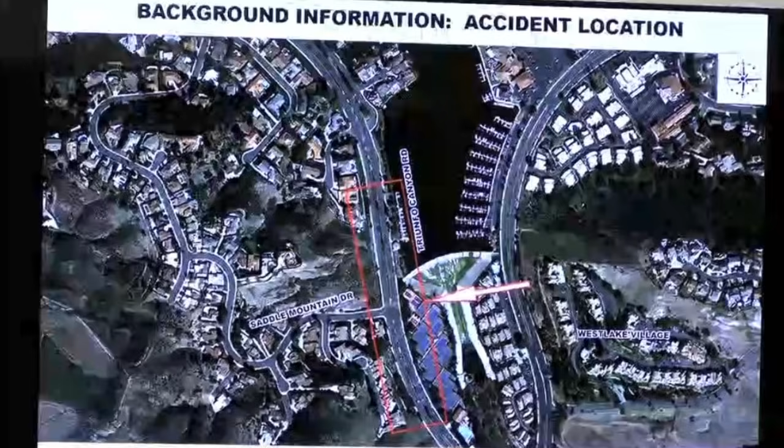Is this an exhibit marked? Yes, 408. I'm sorry, 408-4 now. Okay, tell us, this seems to be more filled in. What are we seeing here? Well, now what we're seeing here is we've zoomed in on the image just to show the intersection, and we were essentially drawing a box around the primary area of interest because that's where the events leading up to the intersection are happening. The north-south oriented street in this image is Triunfo Canyon Road, and the cross street at a T intersection is Saddle Mountain Drive.

May I approach, Your Honor? Yes. Would it help to use a pointer and explain what we're... Yes. May I write? Thank you.

So the aerial image essentially captures Triunfo Canyon Road. From the lower edge to the above is the direction that Ms. Grossman and Mr. Erickson would have been traveling in. There's a crosswalk on the far side of the intersection, and this is where the young children and Nancy and Zach would have also been coming from left to right.

Keep your voice up. Keep your voice up. I will, sorry.

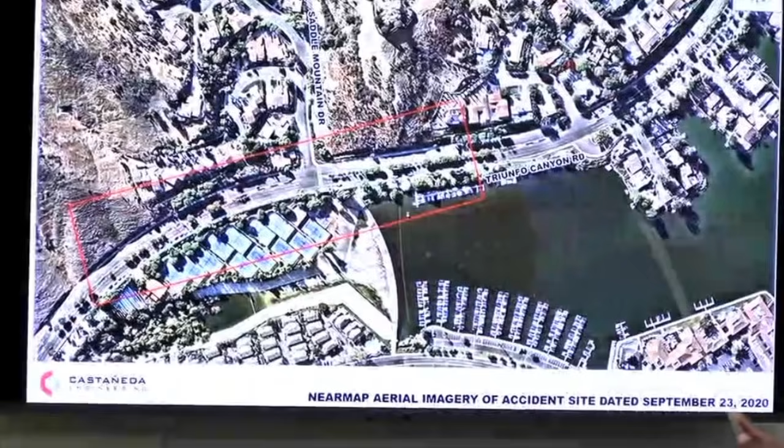Okay, we're on the next one. We're zoomed in a little more. Yes, and what we've done now is essentially started rotating the image without losing sight of what's going on. It's always easier for us to work from left to right when vehicles are traveling at a high speed. So we're essentially rotating the image in consideration of the compass. And in the photograph, we have Triunfo Canyon Road going from the lower left corner up to the upper right corner. You see the curve, and then the intersection where the crosswalk is located, where the children were walking, is within the red box at the approximate center of the box, far side of the intersection.

Okay, now we just essentially rotated for the purposes of analysis. Okay, and I've put in two inserts in that slide. Can you explain what those are? Yes. And for the record, that's 408-7. This image actually shows two of the still frames from the surveillance videos that captured the events after the collision. On the upper corner, there's a camera located within this house in the back patio that actually has a field of view extending in this direction and in this direction. Describe that for the record for us, please.

Thank you. My apologies. The house would be essentially covering Triunfo Canyon Road, specifically the direction of travel that Mr. Erickson and Ms. Grossman were in, specifically from a location 225 or so feet past the crosswalk and several hundred feet beyond. So the camera would capture traffic going in the same direction as Erickson and Grossman, but also in the other direction. For purposes of this work, we're focusing on the direction of travel of Erickson and Grossman, and it's actually depicted in that far part of the video still, which is in the amber frame at the upper edge of the slide.

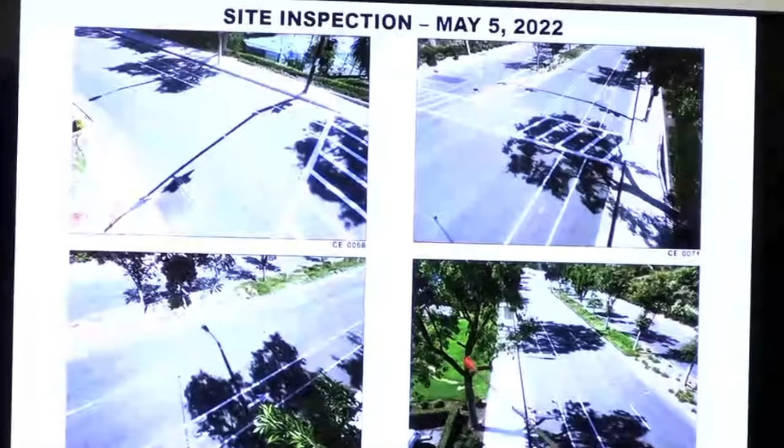Okay, we're looking here now, we're on 408-17. This is a series of elevated photographs that I took at the scene. I have a camera that I mount on a 35-foot pole. And I'm taking a photo of the crosswalk, looking for any evidence that might show up as a gouge or a scrape that would help assist as an area of impact.

The lower left photograph shows the distribution of all the markings made by the officers, which were outlined by me in yellow. At the upper right corner, I'm just standing short of the crosswalk, on the sidewalk, looking downstream in the direction that Erickson and Grossman would have been traveling. And then the last photo that we see, I actually went downstream and am taking a photo of the roadway, and this would depict the direction of travel on approach for Grossman and Erickson.

And one of the things to note here is that there was an outline of what appeared to be a long smear, which would be consistent with a young pedestrian essentially tumbling and rolling through the ground before coming to rest.

All right. And on this exhibit here, what's the purpose of this? It's exhibit 408-18. One of the things that we try to do when we drive through an accident site with our 3D mobile scanner as we're digitizing the site is we actually mount a camera on the vehicle to also document video footage of the roadway on approach. On this particular video, we started some distance before the intersection and drove through the intersection in the process of digitizing the entire accident site.

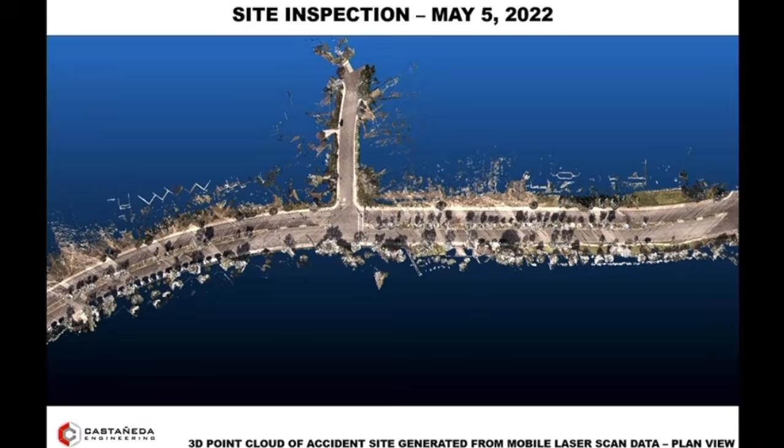You mentioned the 3D point, what do you call it? Cloud. Can you explain that for us? Yes. After we process the data, this is the essential output we get. This is actually a 3D point cloud, which takes all those laser measurements, which are colorized, and we actually get an accurate 3D diagram of the accident site. Of course, it's shown in terms of little points. We just generate the surfaces from the data.

So what you can take away from here is that every tree, all the vegetation, every roadway stripe is actually accurately depicted as measured. So any photograph that you want to reference later on, we can specifically say this particular object came to rest next to a stripe, and I know where that stripe is precisely.

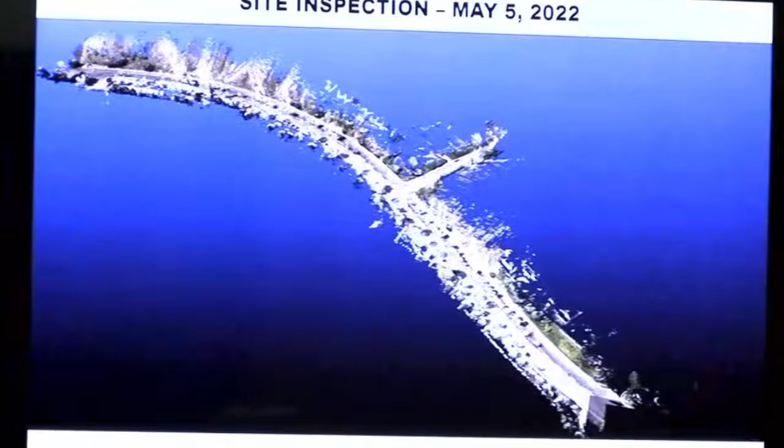And how about this here? This looks kind of different. What is this? This is number 21, 408-21. It's the same point cloud, it's just a different perspective view. This is actually looking past the intersection, but towards the back. And again, this would show the roadway that Grossman and Erickson would be traveling upon, leading up to the intersection and continuing beyond. All right, let's go to, this fills it in? Yes, this is the 3D diagram with the surface roadways. Okay.

Yes. In your career, how many vehicle inspections have you done? It's going to be in excess of 8,000, likely in excess of 10,000. In the 8,000 to 10,000 inspections you've done, in cases where there was injury or death and people are required to produce a vehicle, have you ever, in your entire career, seen someone intentionally produce the wrong vehicle? Relevance. Excuse me. Relevance. Overruled. I have not.

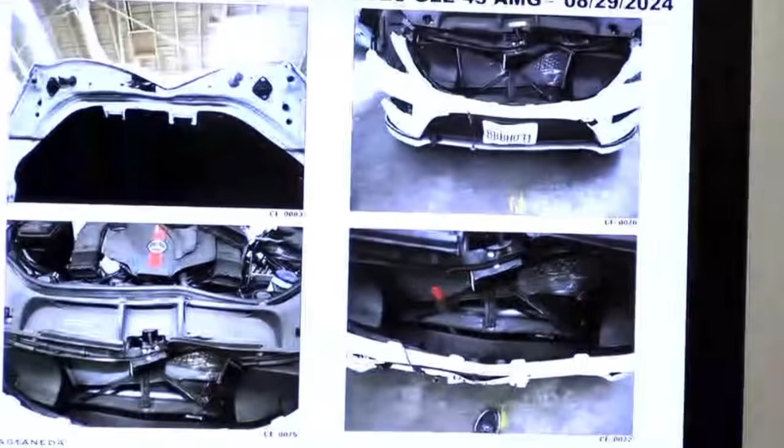All right, let's go to the next exhibit, 30, 408-30. I gotta move it. Okay, what do we see here that's different? Okay, now I'm trying to document the underpinnings. Why is it important to look under the car? Well, first I'm going to look under the hood, and I want to understand the extent of deformation to the leading edge. And I'm also looking for any paint transfer that may not have been captured in the other photos I've taken. I also want to understand how much deflection the vehicle had to experience to essentially cause deformation to load the radiator supports, the cowlings, the plastic filler panels.

In other words, one thing we have to understand in collisions is there's dynamic crush and then there's static crush. Static crush is what we typically measure. In other words, when we go and examine the vehicle sometime after the accident, we're measuring static crush. And let me stop. When you measure static crush, is that the condition of the vehicle when everything's over or some other time? When everything is over. Okay. Now, there's a difference between static crush and dynamic crush of motor vehicles, correct?

Yes, there is. What is the difference? And would you expect to see more damage dynamically or what was the other one? Static. Statically. You're going to see a lot more damage dynamically, more deformation. And that's just part of the concept and understanding of strength of materials.

Materials have properties dealing with restitution, meaning, based on how they're formed, after they're damaged and displaced, they're going to have a tendency after becoming unloaded to try to return to a normal state. What happens in the dynamic collision process is you get maximum deformation, and then after it's over, there's a rebound effect, which results in the permanent post-collision state, which is now a static deformation.

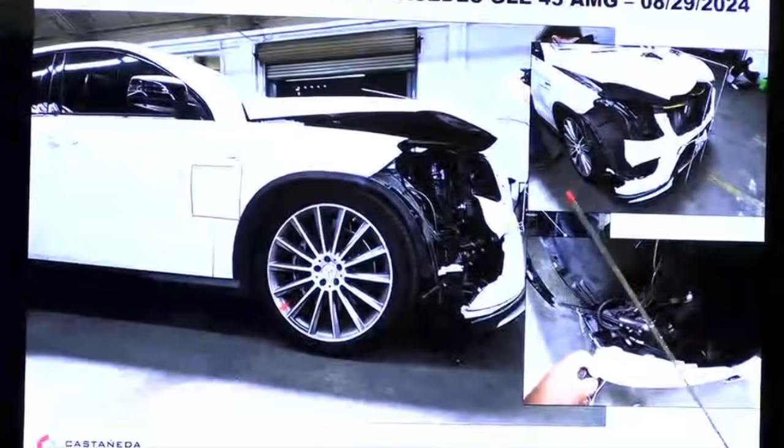Yes, this is, again, a photograph that I took wherein I'm trying to understand the location of deformation to the vehicle on the right side, because now these damages are more specific to Jacob Iskander, the 8-year-old child. By the time I inspected the vehicle, the right headlamp had been removed, but I'm trying to identify markings that I see on the panels. I mentioned earlier there was color transfers consistent with Jacob's rollerblades.

And then we have a deformation at the leading edge of the right front fender. The panel forward of the door, that's the right front fender. The leading edge has been deformed, meaning that energy, or at least loading at the right front of the vehicle, caused the deformation at the leading edge of the fender. And it also imparted some damage to the trailing edge of the fender by the door. So what we're getting here is the phenomenon of buckling. You have a force on the panel and a longitudinal, essentially transferring that load downstream.

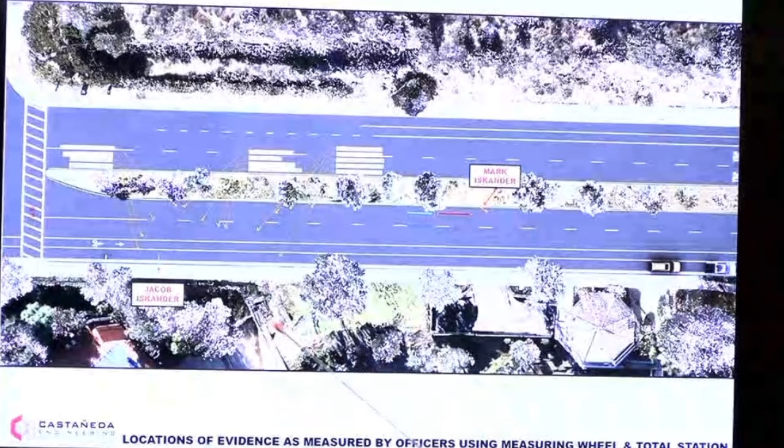Is that what you did here? Yes, this particular slide now is a plan view of our 3D diagram with all the evidence laid out with labels that shows where every piece of evidence documented by the officers was located, including the at-rest locations of Jacob and Mark Iskander. And I mentioned that evidence, the smear on the ground outlined by yellow downstream next to Mark's at-rest position. Okay.

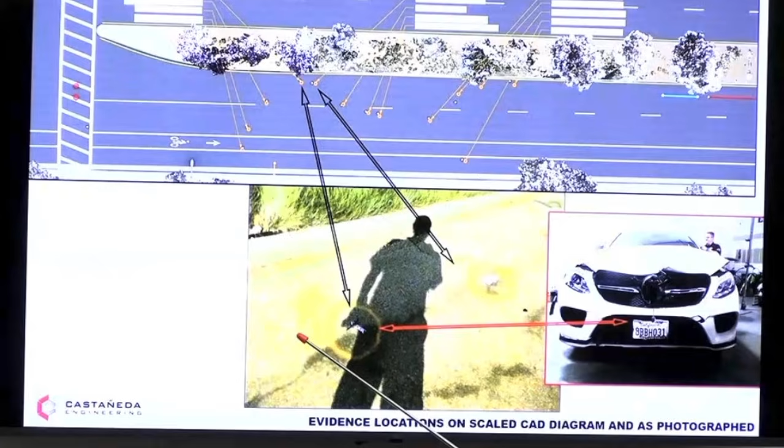This is 408-36. What are we seeing here? Okay, and now what I'm trying to do is help in correlating where some of this evidence is located, but also documented photographically. So for example, in this image, we have a photograph at the bottom. It's a photo of evidence taken at the site. We have item number 4 with an orange circle, and it is labeled license plate debris, which is located here. On the right, I'm actually showing a photo of the vehicle that shows where that came from on the Grossman vehicle. The other piece of evidence is actually a sock from Mark Iskander.

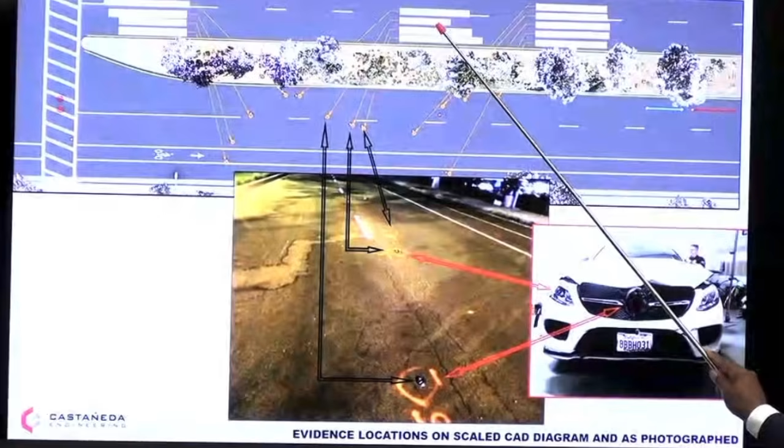And if we go to the next slide, very similarly, we do the same kind of evaluation. Item number 6, V1 emblem, is what the officers labeled it. And that's certainly the center emblem for the Mercedes-Benz, which came from the center portion of Grossman's vehicle. Likewise, V7, the officers labeled V1 fog light debris, and I still don't understand why that happened, but that's actually a chrome trim piece from the right headlamp of the Grossman vehicle. And then downstream, we have another piece of license plate debris. I didn't want to start drawing too many arrows, but it comes from this portion of the car.

All right. Now, using the digitized scene, vehicles, etc., were you able to analyze the video and determine speeds of the vehicles as they were captured in the frames of the video, first from the Golden Leaf Drive surveillance camera? Yes, I was able to do that. How do you do that? Well, one of the reasons we digitize the accident sites is so that we have a full 3D model of the site of the accident. And the way we do it is we identify the location of not just the roadway and the striping, but of all the trees and posts within the center divider, which now can be identified in the camera. So now we actually take this camera and try to do a camera match in our 3D environment. We then select specific keyframes from the video where vehicles are coming by and essentially align with a specific landmark.

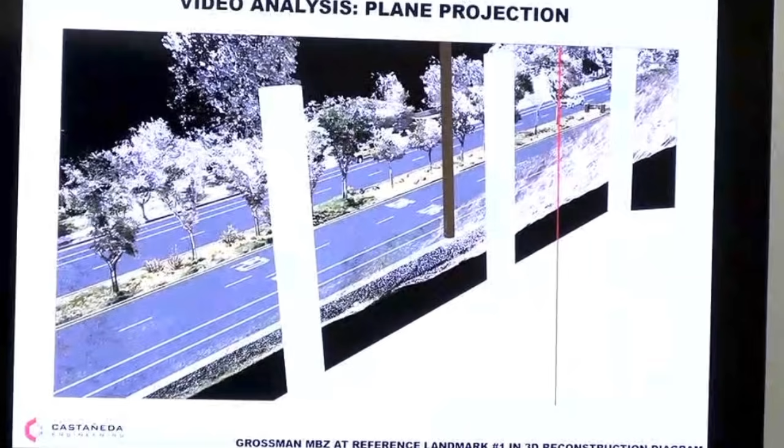So plane, well, explain when you say each plane and how that plays into your analysis. Sure. This is a photogrammetric method of analysis. What we're doing is we're identifying the location of the camera in 3D space. And we're not just drawing a line from the camera through the actual landmark, in this case a tree. We're actually using a 3D plane that we're projecting in 3D. And that's going to serve as a reference mark to identify when the vehicle arrives at that projected plane.

So what we see in red here looks like a line because we're looking at it head on, but it's a 3D plane that's being projected from the camera through that tree and past that tree. And we're essentially using camera matching techniques to identify when the Grossman vehicle arrives at that plane projection as it did in the video frame that we captured. Okay, we'll go to the next one now. We're again continuing on.

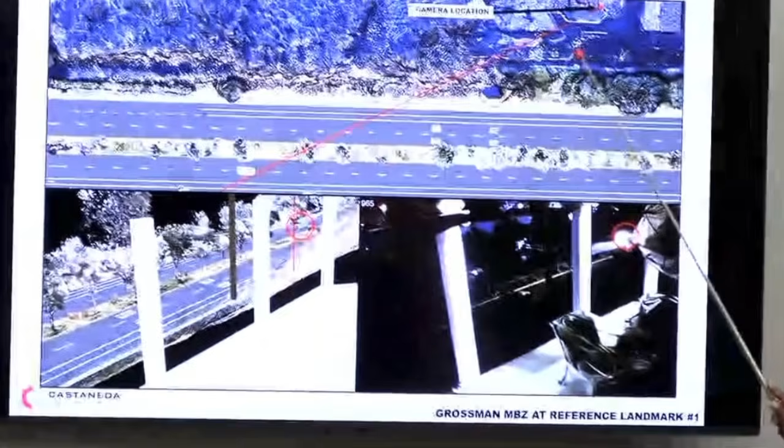This essentially is a summary of that first position. We have the overhead diagram. We have the red colored plane projected through the tree that we identified. We have on the right lower portion the video frame showing Grossman's vehicle arriving at that landmark and the matching 3D digital model. But if you recall my earlier testimony, we work in 3D, so we're actually working in the 3D environment. When we figure out the position of the vehicle, it will essentially reflect where on the roadway it is. Okay.

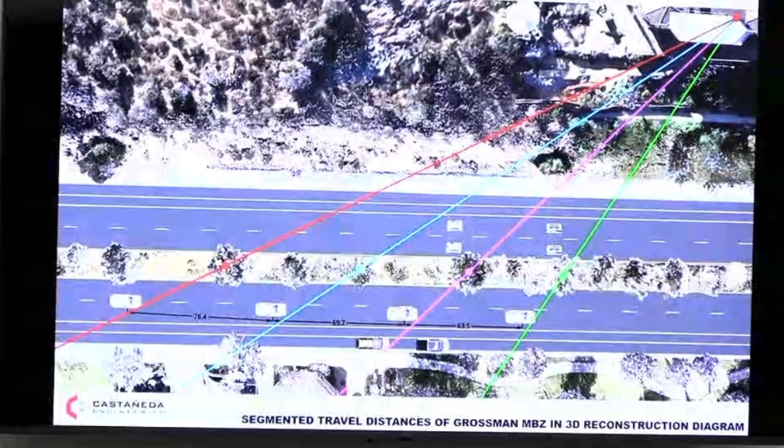Now we have 4 colors. Correct. Remember, the first plane was red, the second plane was aqua, third plane is magenta, and the fourth plane is green. These are the positions of the Grossman vehicle at each one of those key frames. But because this is a scale diagram in 3D space, we can essentially just measure the distance from one position to the next and do so accordingly. And one of the reasons why we want more than just one segment is we can just do 2 vehicle positions and determine a segment average speed. But if we get multiple positions, then we can figure out different segments and determine what it is that the vehicle is doing during that entirety of travel.

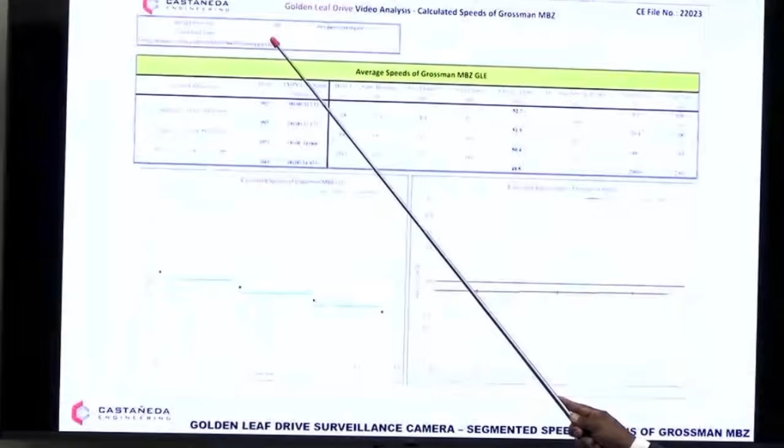And so now that we have those measurements, on the next frame we acknowledge that the camera is shooting at 30 frames per second. How do you determine that? Well, if you recall my earlier testimony, we actually run the video through a separate software that essentially lets us do an inquiry and gives us feedback as to the focal length and the frame rate of the camera. So that's all information. Plus, we also check versus the time clocks as needed.

In this particular table at the top, what we're showing is the specific frame positions that we're using, the timestamps associated with each of those frames, and then we can calculate the time durations in between the frames. And if we know the traveled segment distance and the time duration from one position to the next, we can calculate an average speed of the vehicle as it traveled through the first segment. So in the column that reads SGMT, segment distance in feet, we have the 3 distances for those 3 separate segments. The column prior to that is the time elapsed during the vehicle's travel from one segment to the next. The following column, after the segment distance, we've calculated average velocity during the segment.

So tell us, what was the average velocity of the Grossman Mercedes-Benz GLE during the various segments? Okay. Segment 1, the vehicle is traveling at an average speed of 76.4 feet per second, which essentially is 52.1 miles per hour. During the second segment, the average speed is 74.7 feet per second, which translates to 50.9 miles per hour. The third segment is 73.2 feet per second, which is 49.9 miles per hour.

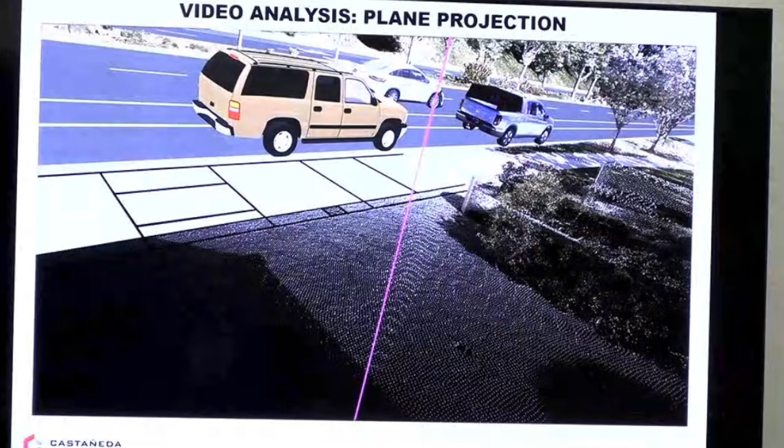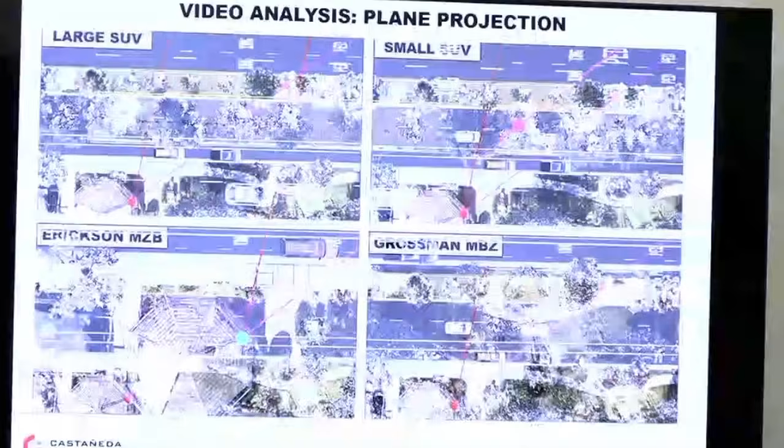Yes, now we're doing the same exercise with this camera, capturing Grossman's position as she's arriving at the start of that first stripe. And then we're matching it in a 3D environment. Then we have the second landmark, which is a magenta colored plane in the very same manner as before, and we do a camera match to get her position there. In this particular analysis, she travels a distance of 44.3 feet from the first landmark projection to the second landmark projection.

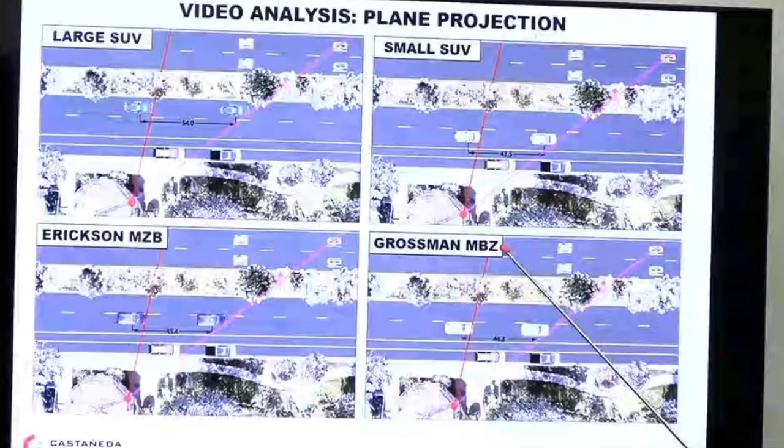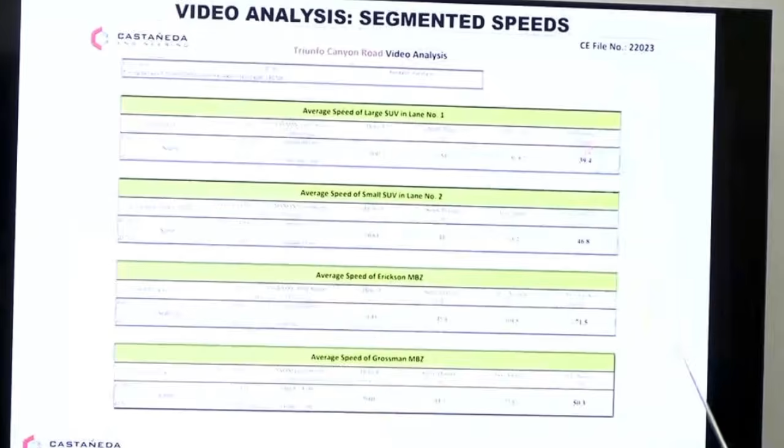And then what we see in this frame is the summary of the exercise for the 4 vehicles. At the upper left corner is the first vehicle, the large SUV. The upper right is the second white-colored smaller SUV. Lower left is the Erickson Mercedes, and at the lower right, we have the Grossman vehicle. How about the speeds? Same methodology as we mentioned before. We have an average speed through that segment for the first vehicle at 57.8 feet per second or 39.4 miles per hour, comporting very well with the previous exercise. The second SUV is traveling about 46.8 miles per hour. The Erickson vehicle is coming through that segment at 71.5 miles per hour.

And then the Grossman vehicle is traveling through that area at 50.3 miles per hour in that segment. Okay, let's talk about the post-collision travel of Miss Erickson. Let's strike that. Do you have an opinion as to which vehicle struck the boys? Yes. And what is your opinion? Oh, the Grossman vehicle impacted both Mark and Jacob Iskander. Is there any question in your mind about that in this case?

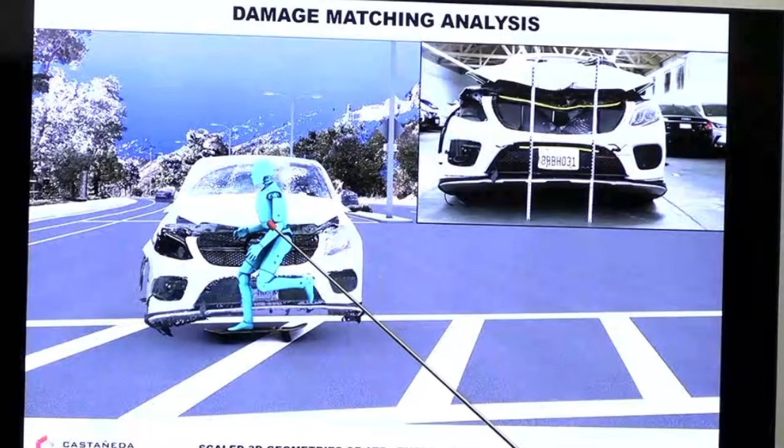To a certain extent, I also looked at the injury patterns of Mark to understand the potential positions of some of his extremities and how they would have been interacted with by the vehicle. And there are some pictures that show that, we just took those out of this. That's correct. Okay. So right now, I'm actually using an ATD dummy of a young child positioned in a configuration that aligns with the damages that we see, with the largest impression on the hood being in an area to the right of his torso and his arm being positioned there as identified by some of his injury patterns. And then there's actually one photo that shows the arm in a very irregular, unusual position. That's correct.

That's correct. And if you recall my inspection photos, there's significant damage to the radiator. And that's obviously because that's going to be loaded by his hip area, lower and center of gravity area, getting into that part of the vehicle, causing damage to the grille and causing the logo emblem to separate. Additionally, there's damage patterns across the license plate, which comport with injuries to his lower leg. And then there's other photos taken by officers of the undercarriage of the vehicle that comport very well with interaction with the skateboard that Mark was using.

That was gonna be my next question. What happened to the skateboard? Well, the skateboard went under the car. The skateboard exhibits clear evidence of interaction with the undercarriage of the vehicle in the area forward of the front wheels. And then it was run over by the vehicle. The skateboard shows fracture patterns indicative of the tire going right over it.

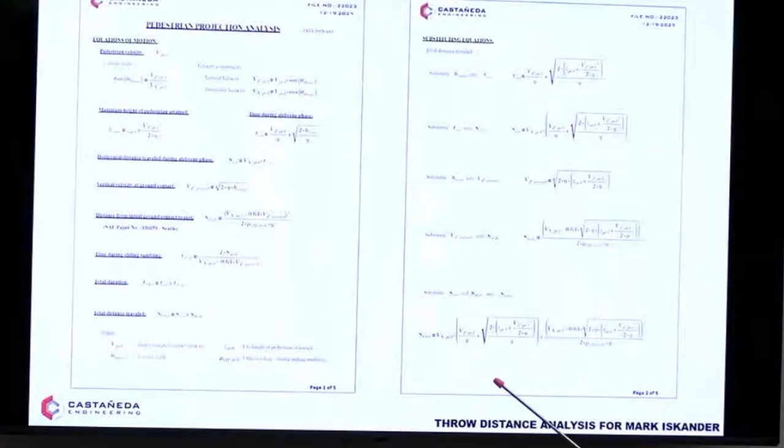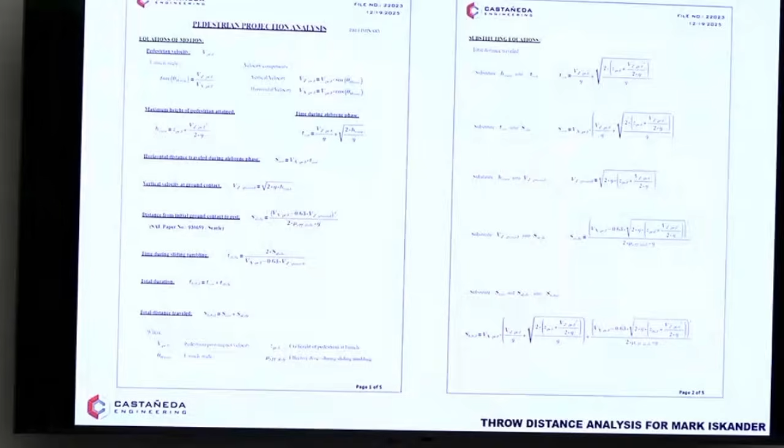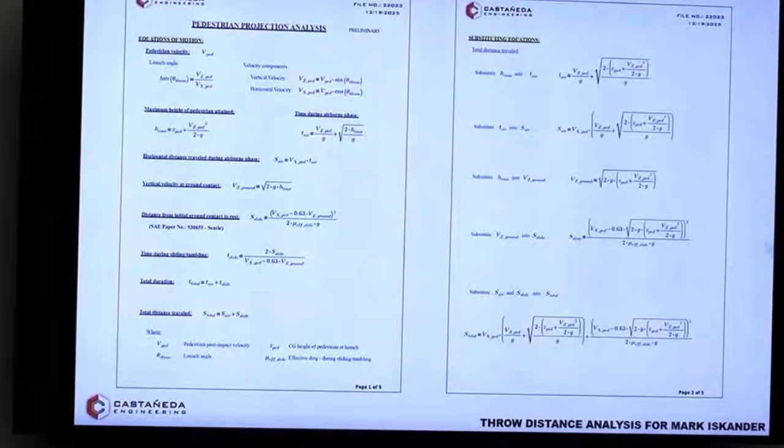Okay, we're looking now here at Exhibit 40884, and on this, it looks to me like some kind of math. What kind of math is that? This is actually a series of calculations for kinematics. They're engineering computations, and it's our analysis to determine how much speed the Grossman vehicle needed in order to displace Mark 232 feet downstream. So it's based on projectile motion, it's based on conservation of energy, and it's an actual iteration going back and forth, substituting one form of equations to another to reduce the number of unknowns. We're not going to go through the math.

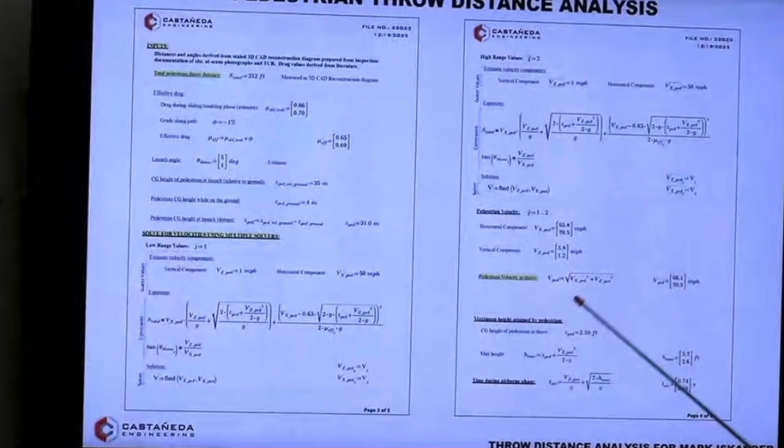Okay. And this is more math? Correct. And in this particular slide, the page on the right, we're using solvers to understand or to reduce the unknowns and get us to a much narrower figure of what is probable. Based on these calculations, we know that Mark's velocity at throw, meaning when he's separating from the vehicle, is between 66.1 and 70.5 miles per hour.

And if we move on to the next phase, accounting for the potential projection efficiency, meaning we spoke about energy dissipation, energy losses. We also have to account for the fact that this is not two fully elastic type of balls that impact and bounce off each other. The collision has to account for some absorption, and that's addressed in the form of a consideration for efficiency. This particular collision is about a 95% efficient collision, meaning that's how much of the speed on the part of the Grossman vehicle was imparted to Mark. But once we account for that, we come up with the resultant speed on the part of the Grossman vehicle ranging from 69.6 to 74.3.

So this is essentially the result of our independent analysis based on the evidence. And I take that value and I compare it to the crash data that was downloaded from the vehicle. And I think we're getting a very good residual, meaning that the reported speed of the Grossman vehicle at impact aligns very well with what the physics tells us occurred. And this is another way of essentially validating the crash data. And you told us how you were checking, double checking, triple checking the EDR data. This is how you're doing it, one of the ways? Yes, this is one of the ways.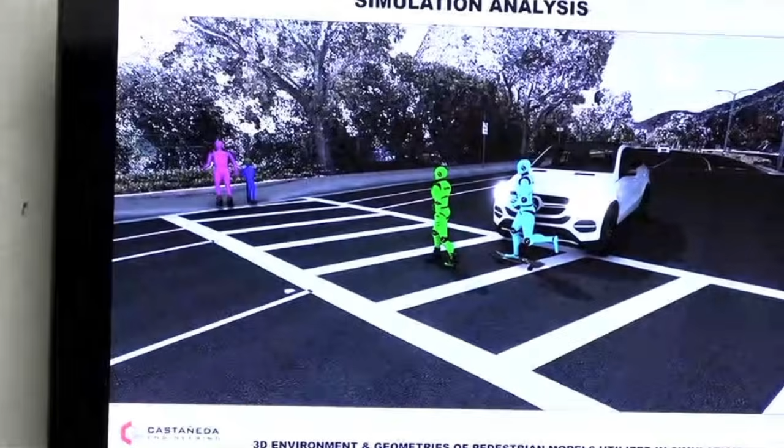All right, and what are we looking at? It's a simulation analysis. This is the third way that we're going to actually understand and try to verify that one, the EDR data is correct, but also that our analysis of the projection or pedestrian throw distance is correct. So we actually have a 3D environment, which is based upon the 3D scan data of the accident site. We have a 3D model of a Mercedes-Benz GLE 43 like Ms. Grossman's. And we have ATD dummies representing Mark in an aqua color and Jacob in a green color.

And then downstream, we have Ms. Iskander and Zachary. Now, you're not saying that that's where they were or anything when the impact occurred, right? No, correct. And it's too difficult. You know, they weren't involved in the collision. What we do know is that they're ahead of the boys. And we do know that they weren't impacted by the Erickson vehicle. So this is just a sample of saying this is how the collision is occurring, but we're focusing on primarily Mark and Jacob. And again, same thing on Miss Grossman's vehicle.

Yes, this is the 3D model of the vehicle. Okay, now, what is the simulation and what is the video output? Okay, a simulation analysis, this is not like an animation. And there's a big difference between a simulation and an animation. In an animation, you don't have any physics constraints, meaning you can make a pig fly if you felt like it. You can make a car float if you felt like it.

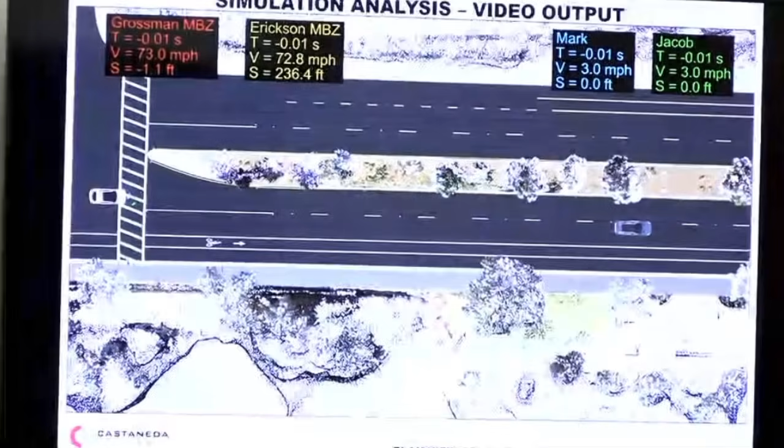When you run a simulation, there's physics constraints that have boundaries. In other words, if I throw, let's just say a bag of sand and try to roll it on asphalt, well, the physics tells us that the friction is going to cause that bag to hit and then probably stop relatively short. In animation, I don't have those constraints. I can throw that sandbag and it can slide for 400 feet.

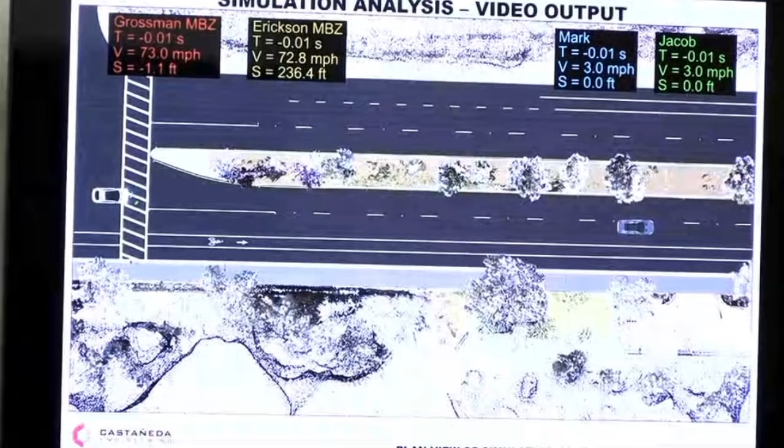So a simulation is actually another way of running calculations with an independent check to say, if you're not matching the evidence and if you're not obeying the physics principles, you're not going to get proper results. And this is a third method of doing the validation.

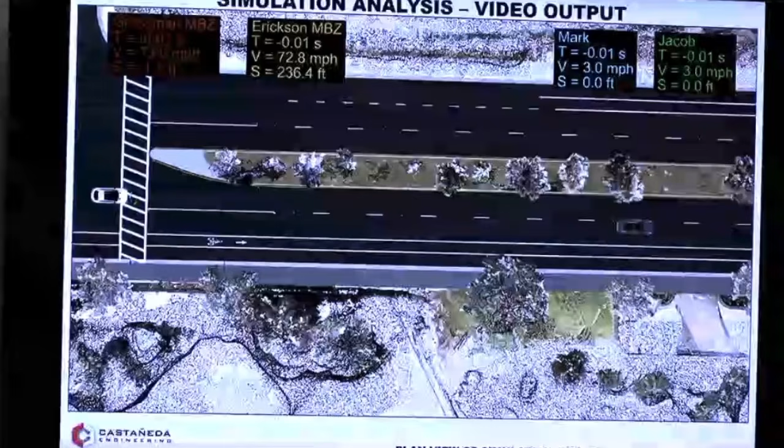And what is the name of, I assume there's a software you use for this? Yes, the software we're using is Virtual Crash in this particular analysis because it happens to be one of the better software applications for use in momentum exchange when pedestrians are involved. And is this something that's commonly used by experts in your field in reconstructing accidents? It is. Are you trained and licensed to use these programs? Yes, I am.

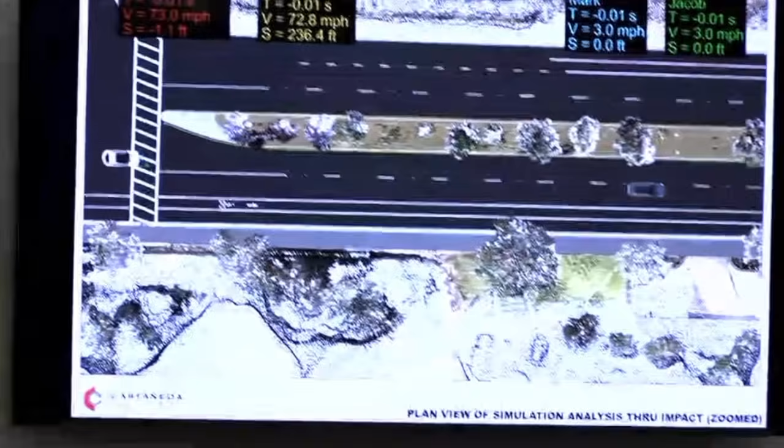And used them in the past and find them to be reliable and accurate? Yes, I have. Okay, so if I click, this is going to play? Yes. Tell us what we're gonna see, then I'll do it, please. What we're seeing here is the analysis starting just before impact with the Grossman vehicle in white at the left edge of the screen.

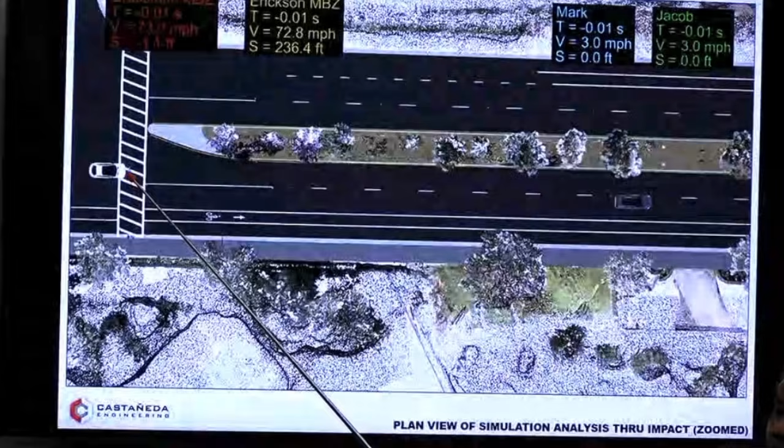We have Mark, the 3D geometry that we saw in the simulation from a perspective view. And we have Jacob in green, both in the crosswalks. And at the very top, we have tables telling us the speeds of the vehicles and relative locations. So with respect to Grossman, we're having our vehicle travel at 73 miles per hour, consistent with the EDR data and consistent with our independent analysis.

We also know from the analysis that Jacob comes to rest in this area, and we know that Mark comes to rest in this area. And this is that center sign in the center divider that I alluded to earlier. So what we're trying to do is have the vehicle traveling at 73 miles per hour interact with Mark and with Jacob to try to reproduce the same at-rest positions of the children post-collision.

And across the top, explain what we see. Again, these are tables specific to each one of the parties involved here. At the upper left, we have Grossman MBZ, which is the Grossman Mercedes. The next table in gold is Erickson MBZ, which is the Erickson Mercedes. And then we have Mark in an aqua color text, just like his 3D geometry. And then the next one is Jacob in green. And I have them traveling at about 3 miles per hour at the time of impact. So if we could play it. Yeah, if we can play it.

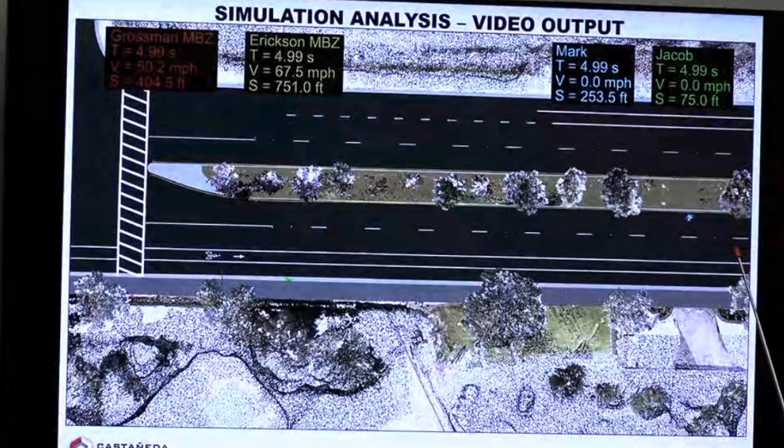So one of the things that we see here is if we actually know the impact configuration, know the post-collision path of the Grossman vehicle, as we know she's going to decelerate based on the downstream evidence that we've analyzed already, we should have at-rest positions for Jacob and for Mark that comport very well with the totality of the evidence and with the photos taken at the site. So in essence, this is our third way of saying, you know what, the EDR data is correct. In our throw distance analysis, everything lines up very well.

Okay, let's go to the next. Could you explain, each time I click the slide, it goes down on the EDR, I think 0.5 seconds, is that right? That's correct. So prior to these slides, Mr. Panish, we've evaluated everything from impact downstream, right? We did the post-collision speeds. We did the validation of Grossman speed at impact. We know the time duration that elapses from when Erickson enters the camera field of view till Grossman's vehicle enters the field of view. Now we're going to focus on the approach travel.

And this is where the EDR data, now that we've validated the speed, we can now integrate the positions of our vehicle and the speeds based upon the data provided to us. So by taking this information, we can essentially calculate how much distance she travels from 1 second to the next on approach to impact. So the very first slide, we had our vehicle at 5 seconds before impact.

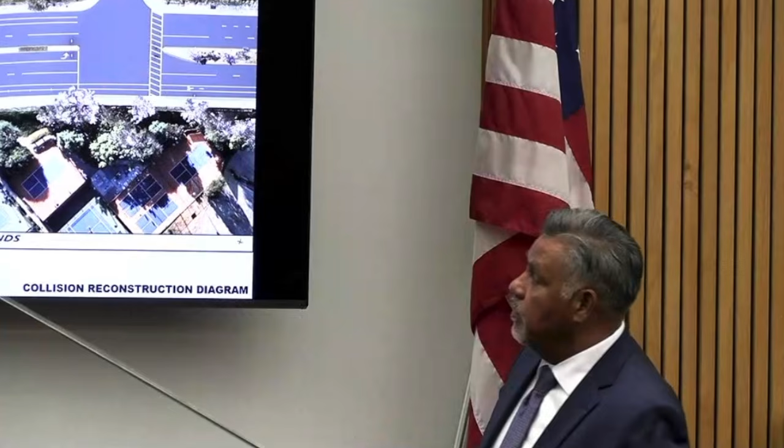So if we move to the next slide, a second later, she's right next to the light standard in the center divider. This is at 4 seconds before, and she's traveling at 75 miles per hour, and she's almost pedal to the metal on the gas. So on approach to the intersection at that point in time, that's her speed. Second later, 3 seconds before she arrives at the area of impact, she's still applying full throttle, traveling at 78 miles per hour.

And when she's applying full throttle, 98%, where is the Erickson vehicle located? Well, at this point in time, 3 seconds before, the Erickson vehicle's ahead of her, just prior to entering into the intersection. And the vehicle's in the process of returning into the number 2 lane of travel.

And why would somebody put down the accelerator 98%? Well, to get the vehicle to go faster. Is there anything else, any other reason why you would do that? You know, I don't want to get into the psychological aspect, but unless you just totally misapply a pedal. Other than that, the reason you press the gas is to try to go fast. But are you going to misapply it for that period of time? I really doubt it. Go to the next.

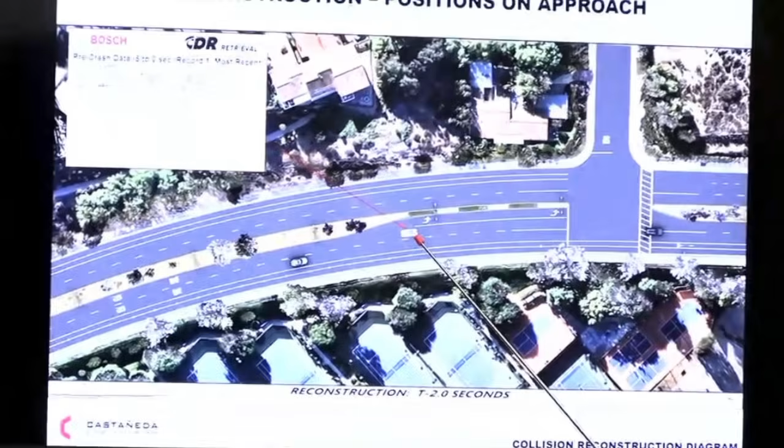Okay. Now at 2 seconds before impact, at this point in time, the driver Grossman is positioned just at the start of the stripe that designates the left turn lane. At that point in time, she's traveling 81 miles per hour, but now she's no longer on the gas pedal. And she's also not applying the service brake pedal. Okay? And she's traveling 81 miles per hour.

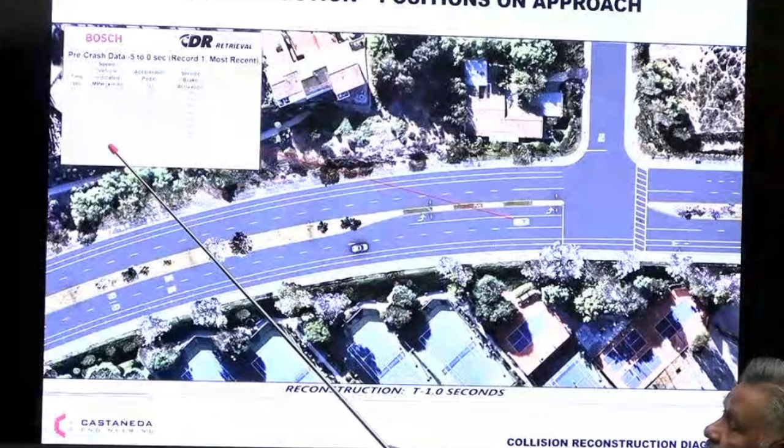Okay. The next slide, 1 second before impact, she still hasn't entered the intersection. She's traveling at 78 miles per hour, and her service brake is on. And her service brake pedal application started roughly a half a second before that. And how long did she apply the brakes? Well, she applies the brakes for approximately, let's see, between 1.5 and 2 seconds.

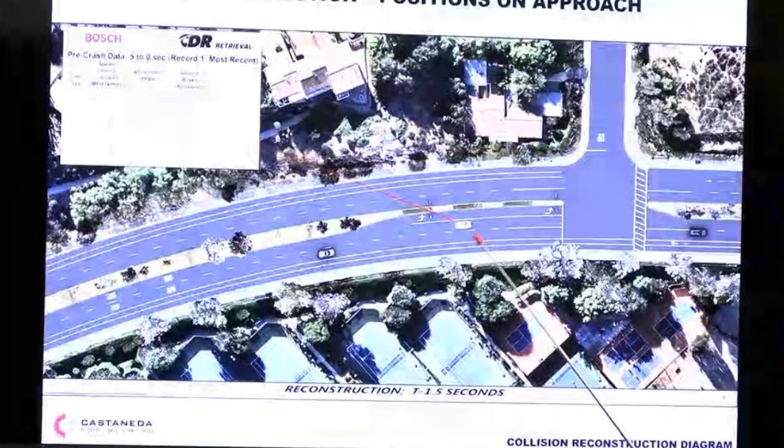Are you able to tell where the vehicle was when she first tried to apply the brakes? Well, I think if we go to the prior slide, this is, oh, no, one more. No, go forward one. Okay, at this position, 1.5 seconds before impact, this is where her vehicle is, and at that point, the brakes definitely are on. So it's just before she arrives at this position, in this general area, where she starts applying her service brake pedal.

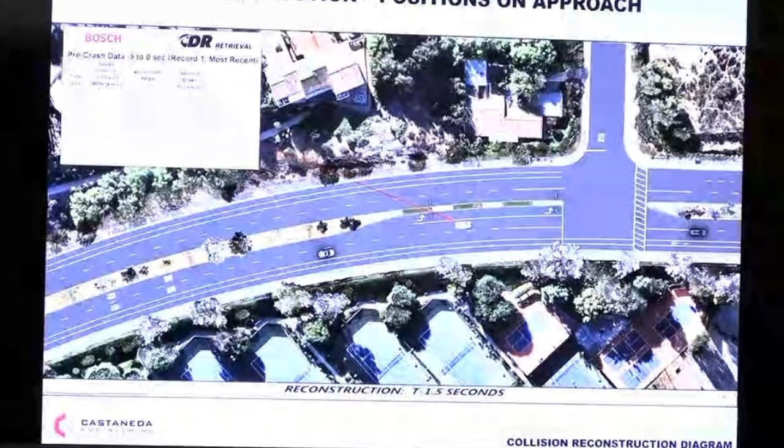The faster you go, is it harder to brake? Well, it's not harder to brake. You brake the same, but it just takes a longer distance to stop. That was my question. Well, the faster you go, assuming you're going at 2 different speeds, one slow, one fast, you apply the brakes at the same application pressure. Which car is going to stop first? At the same brake application, the slower moving vehicle. It'll take less distance to come to a stop.

And did you do an analysis, had Ms. Grossman been traveling the speed limit, whether she could have avoided this collision? Yes, I have. And what was your opinion in that regard? Well, if we take her back at the same position where we have her 5 seconds before, traveling at 73 miles per hour, if instead she's traveling at 45 miles per hour at that point in time and just stays at that speed, she arrives after the children clear. So there's no accident.

All right, let me go to the next one. And we've gone through these, I'm just going back. Okay, we see this? No. Yes, this is the total simulation analysis, accounting for the pre-crash positions of Grossman, shown in white at the left, all the way through impact and post at-rest position of Mark and Jacob.

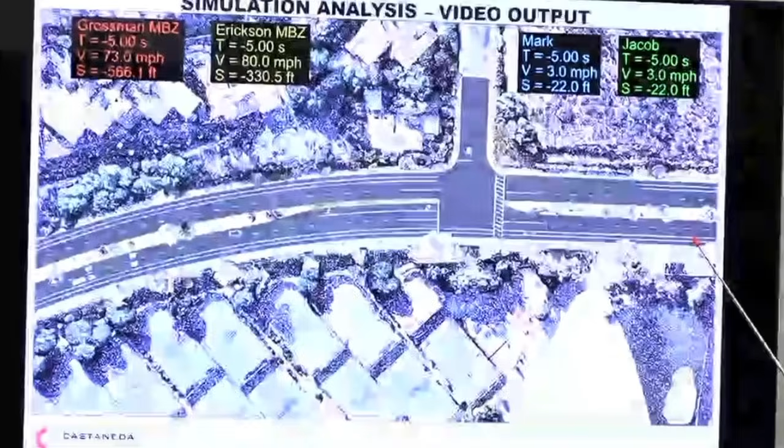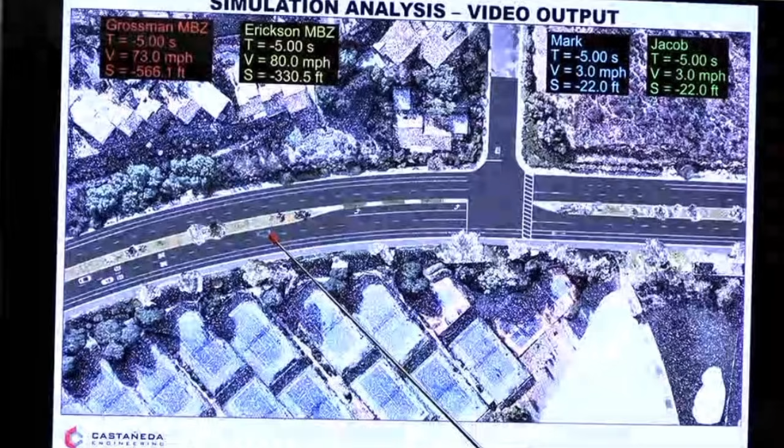In this frame, we also have the witness, Efkatari, I believe is her last name, and we also have the positions of the Erickson vehicle. You're not going to be able to appreciate it, but we do have the children in the crosswalk.

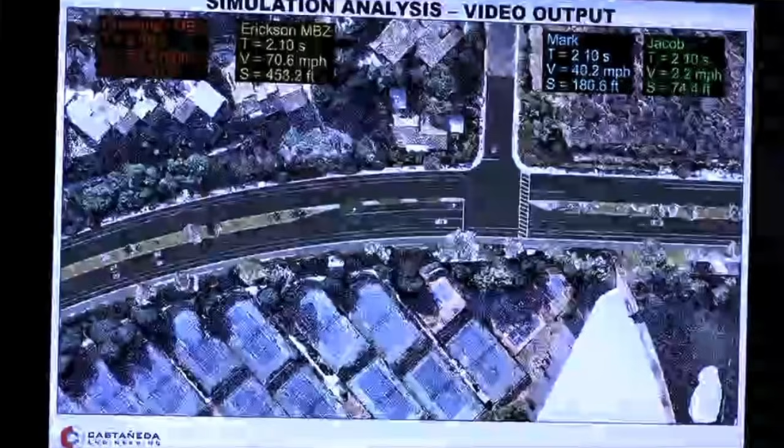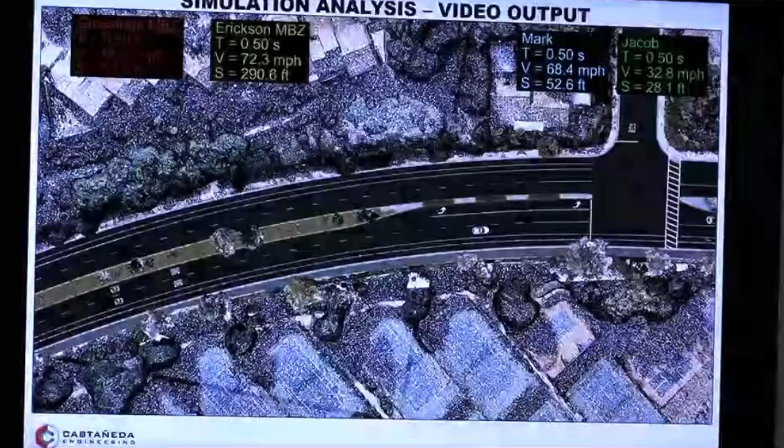Okay, that's essentially the same simulation. It's hard to appreciate from such a high position. So now we're looking at the simulation of the pre-crash motions. And it has, again, time, speed, or V, speed, and S was what, feet per second? Distance. Distance. So, and it's the distance relative to the area of the crosswalk where the impact occurred. So when you see a negative number, it's before. If it's a positive number, it's after.

Okay, so for here, we have Erickson, 0.673 feet. No, the Erickson vehicle at this position is still 167.3 feet from the center of the crosswalk. And this is at 3.61 seconds before the Grossman vehicle collides with the kids.

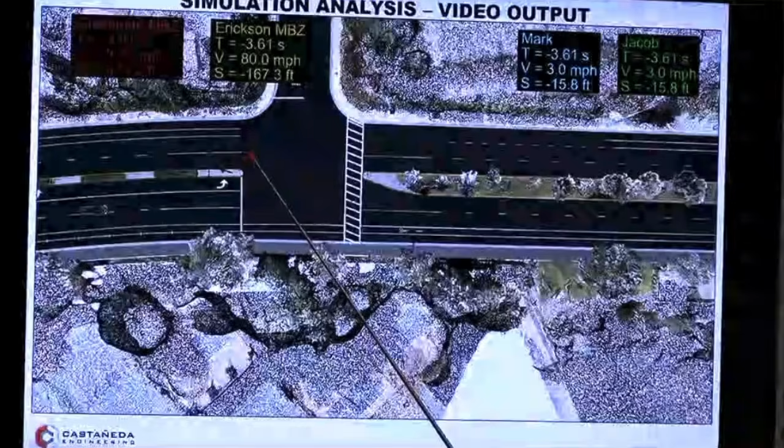Did you analyze the actions of Mr. Erickson driving this vehicle? Yes, I did. Were you able to assess how close he came to striking Jacob and Nancy and the young, and Mark and Jacob? Objection. Counsel, sidebar.

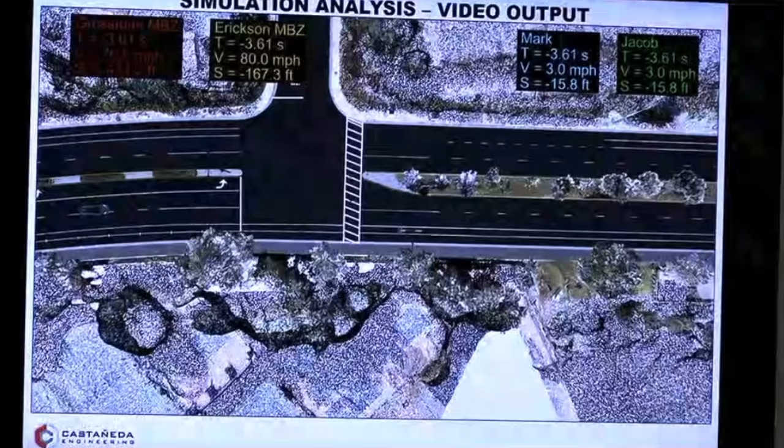When we broke for lunch, I think we were on slide number 408-100, if we could go back to that. Okay. Should I play? Yes.

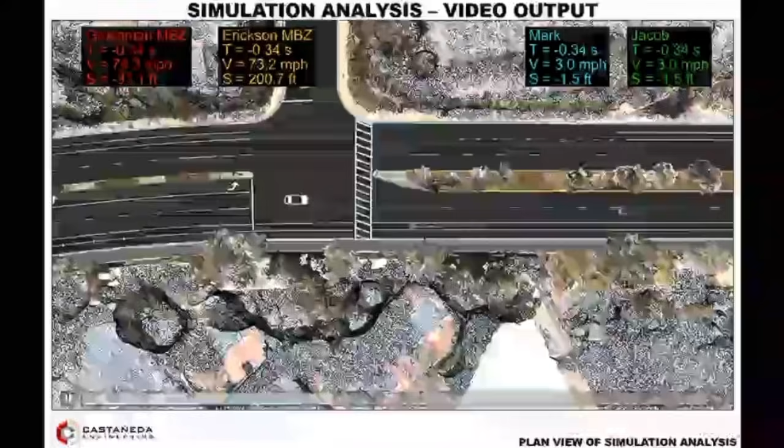Now, in your video analysis, did you determine how far in time-wise, when they came to the location, that Mrs. Grossman's vehicle was behind Mr. Erickson? Yes. And what did you determine? If you recall from the video analysis, I determined that the Grossman vehicle entered into the camera's field of view, the Golden Leaf camera, 2.87 seconds after Erickson entered that field of view.

Is that significant to you? It's very significant. Please tell us why. The importance there, it's actually involving multiple factors. I mentioned earlier that in accident reconstruction, we work backwards. The first physical evidence we have to derive the speed of Erickson is when that vehicle enters the field of view, traveling at 73 plus or minus miles per hour.

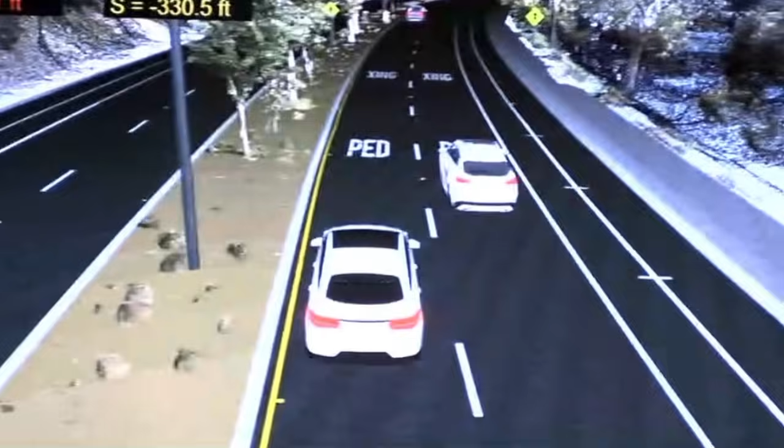We have to recall from the additional work that Grossman enters that field of view 2.87 seconds later, traveling at 52.7 miles per hour. But back at the crosswalk, she was traveling at 73 miles per hour. So she's undergone a deceleration by braking. In other words, she's covering the 220 or 225 feet of travel from impact to entering the frame of the camera at an average speed between 73 and 53, which is roughly 63 miles per hour.

We know that Erickson is coming in at 73 miles per hour, which means that given the speeds and the distances, if you extrapolate back, it puts the vehicles closer in proximity to one another, less than 2.87 seconds as they're going by the crosswalk and on approach there too. In addition to that, additional information to take into consideration are the following.

I believe that Mr. Erickson testified that on approach he tapped his brakes when he saw the children in the crosswalk, but he also says that he subsequently accelerated his vehicle. We know from the physical evidence specific to his vehicle, when he enters the field of view of the camera, only 2 seconds after he passes by the crosswalk, that he's going 73 miles per hour.

We also know from the analysis of that video that he's actually decelerating and not accelerating, which means that any acceleration, if it occurred, and so far my work doesn't support that, would have been ineffective, if anything at all. So we know that moving them back and accounting for any brake, even if it's just a tap, would slow his vehicle from the original travel speed to a speed slightly greater than the speed at which he entered into the field of view of the camera.

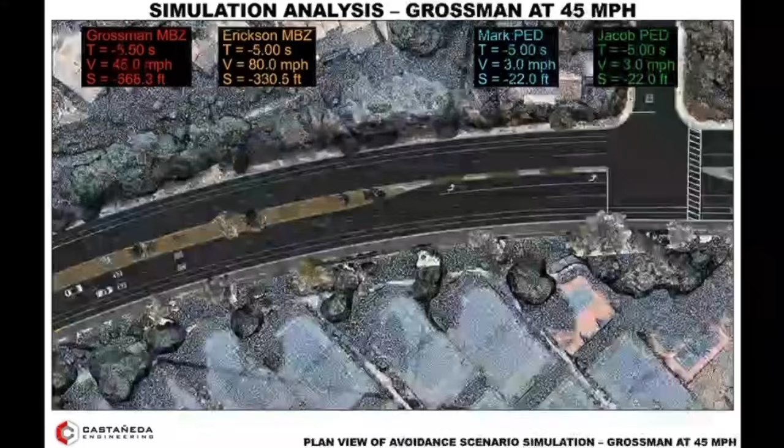But if you want to have reference, so what we're looking at now, this is 102, this is the avoidance analysis. Do you want to move on to that or go back? No. Go back. Go back one. Yeah. Mr. Owen told me I should go back.

Okay, go ahead. Okay, and we may want to pause. One thing I'll clarify here is that the white vehicle we see in the number 2 lane is the witness vehicle, F. Qatari. She's testified that she was passed by the vehicles, and we have information based on photos and so on as to where she came to rest, along with her testimony. And putting her vehicle in place and showing the last 5 seconds of approach, we see a path of travel of Erickson consistent with him attempting to return to his lane of travel from the number 1 into the number 2 lane as he's approaching the intersection.

So if we want to maybe play a couple of seconds, we can get a better idea of the position of the vehicle. If you pause it right about there. What happened? I think you're sliding to the next slide instead of pausing it. Can you make it go to the beginning? There you go. Where do you want to stop? Right there? Pause, yeah.

This gives us a pretty good idea of where the Erickson vehicle is positioned on the roadway relative to Mark and Jacob, which are depicted to the left of his vehicle. You actually see that we've accounted for the braking that he's described, which is a gentle tapping of the brakes. I think he says for a second or less than a second, so we're applying 0.29 Gs for 3/4 of a second, consistent with just a tap.

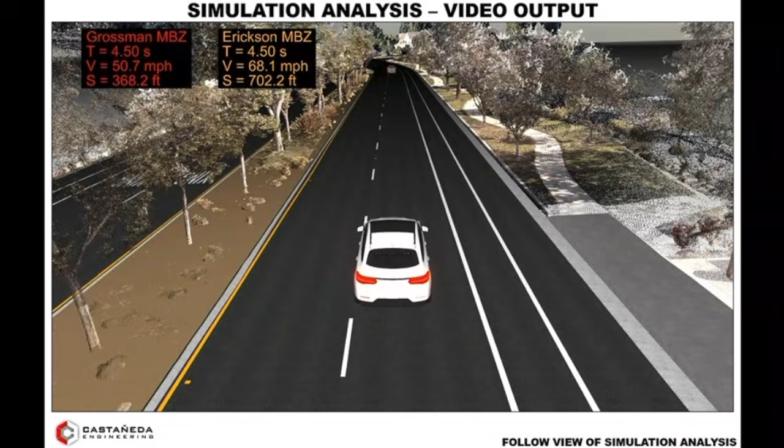Just seeing this through now. Did Mr. Erickson's failure to yield in any way affect the transit of the two boys as they walked across the street? Legal conclusion. Also speculation. I'm sorry? Legal conclusion and speculation. Overruled. I think the relative close proximity of Erickson to the crosswalk on approach and the speed probably would not afford a pedestrian at normal travel speed to try to clear the path before the arrival of Erickson.

What about an effect that Mr. Erickson's traveling had on Miss Grossman's ability to see the pedestrians? In your opinion, did it have any effect? You mean like an obstruction? At the crosswalk? Well, I think if anything, what we know from Erickson being ahead of Grossman is that its headlights are going to help illuminate the kids in the crosswalk, plus any braking on the part of Erickson, as he's testified to and that we've shown here, would also help a following motorist recognize that there's something going on. And that would be another visual cue that may trigger the start of an evasive response.

And as far as the ability for the boys to evade Miss Grossman's vehicle, was that impaired by the actions of Mr. Erickson?

Well, there's 2 seconds that elapse from when Erickson is crossing the crosswalk until the children get hit by Grossman. I have the kids moving at 3 miles per hour, which is about 4.5 feet per second. And they're getting struck by the center of the car. So even if they could assume that they could clear, they would have to move at speeds which cannot be performed by children to try to clear. In essence, they're not going to be able to get through.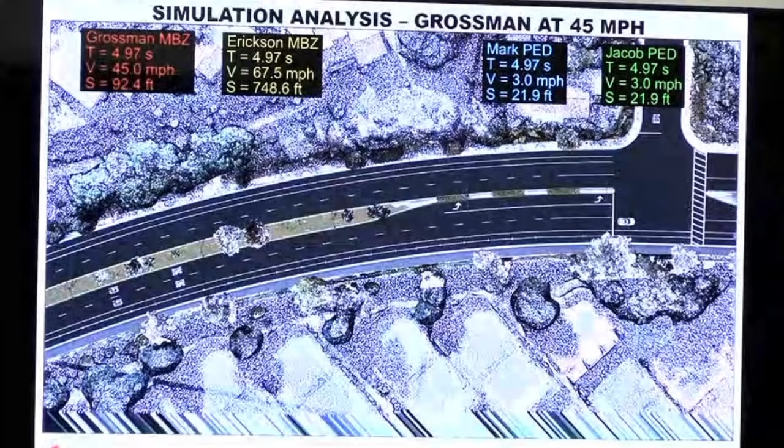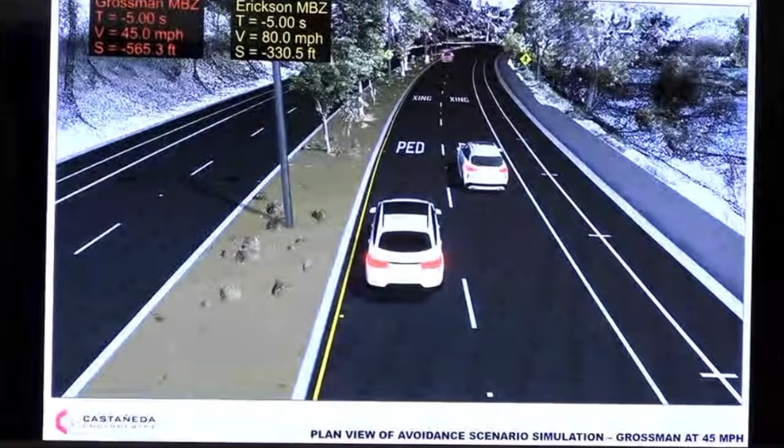All right, let's take a look at this. This is if she's going 45 miles an hour. Yes, and it's the white vehicle in the number 1 lane. And what happens? Well, both Mark and Jacob clear both lanes of travel and arrive at the other side of the intersection safely. I'm going to show you 408-103. It's the last slide. You just play it here. What are we seeing here? This is the same avoidance with Grossman traveling at 45 miles per hour on approach.

So, had she been traveling the speed limit, would the accident happen or not? If she's traveling at the same speed, 45 miles per hour from the first reported speed, 5 seconds before impact, and just maintains that speed, she doesn't have to do anything in terms of braking or anything else. Just navigate the lane, and that affords both Mark and Jacob sufficient time to safely clear the intersection. No collisions occur.

And is it common for you in cases like this to review testimony depositions of experts that might be opposing you in the case? It is, yes. Did you see any expert, accident reconstruction or otherwise, regarding how the incident occurred, retained by Dr. and Mrs. Grossman? I've seen work performed by someone in that capacity, yes. Did anyone they have disagree with the speeds that you gave? Objection, relevance? Overruled. The calculations of speed for Grossman align very well with my speeds. The speed determination for Erickson, when it first becomes apparent in the video, I believe the analytical number crunching shows a speed of 78 miles per hour, whereas I have 73. But I think in terms of the opinion was that it could range from 70 to 78. So it aligns very well with what I've done.